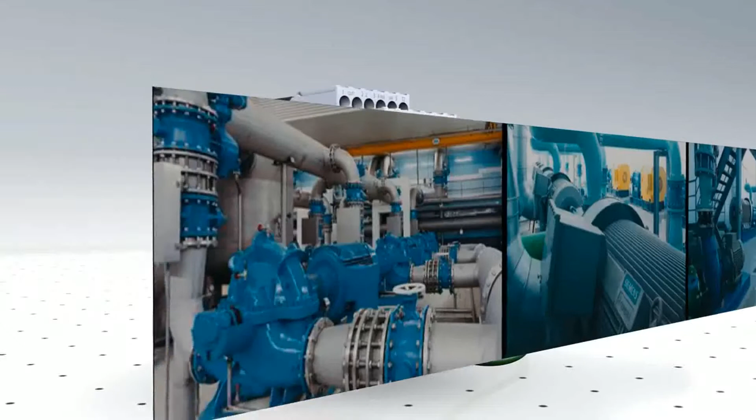As well as security and reliability, energy saving is a core issue for you as a plant operator. To support you here, Simocode Pro for Profinet provides the standardized Profi Energy transmission profile. You can use this option for your energy management without additional devices, thus saving power and so reducing your costs thanks to efficient motor control.

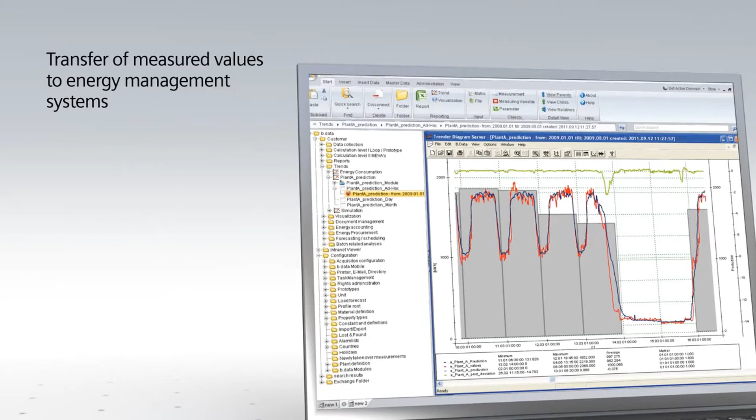An important standard function here is the pause circuit. If a motor is not required, it is switched off for a specific time. A further benefit of Simocode Pro and Profi Energy: the protocol provides measured values such as current, voltage, or power and transfers them to energy management systems. There, they can be analyzed to detect potential savings.

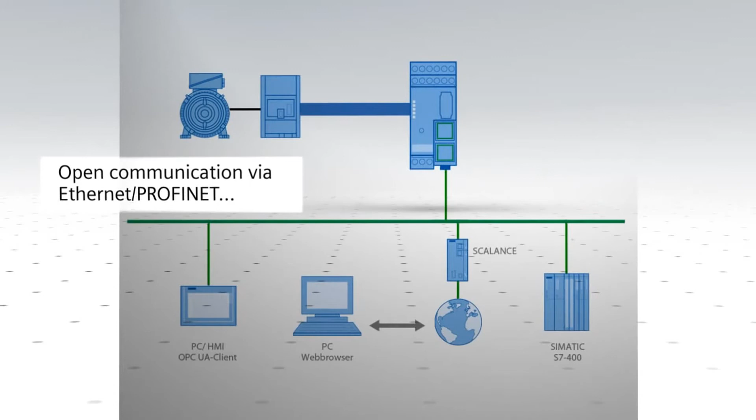Simocode Pro does everything on a single communication link. Communication with the controller runs over Profinet, web-based access runs over Profinet, and the device also transfers data to HMI systems over the Profinet cable on the basis of OPC unified architecture. This means you need only one network for everything, and you save on hardware and cabling overhead.

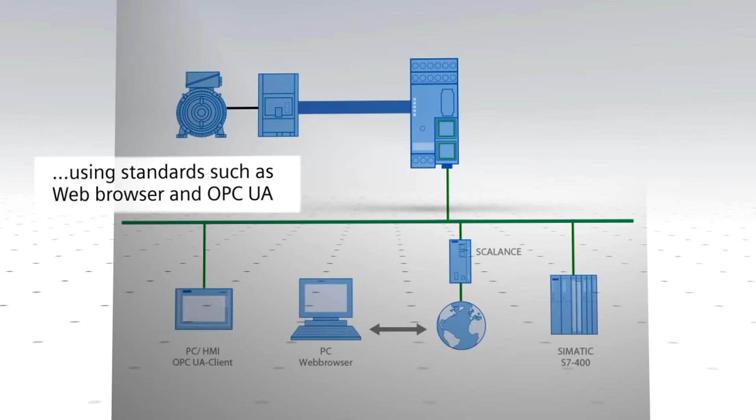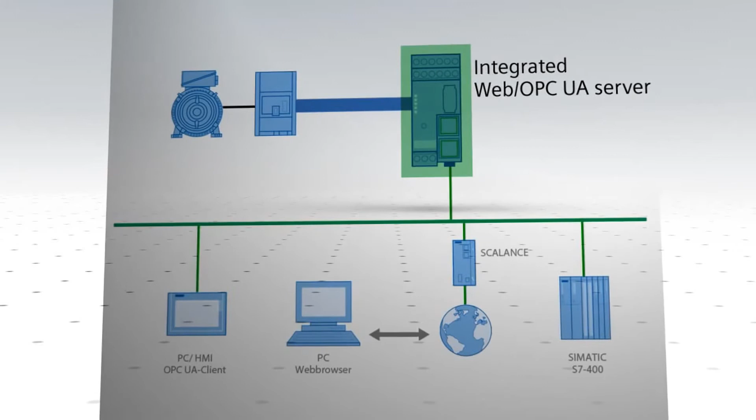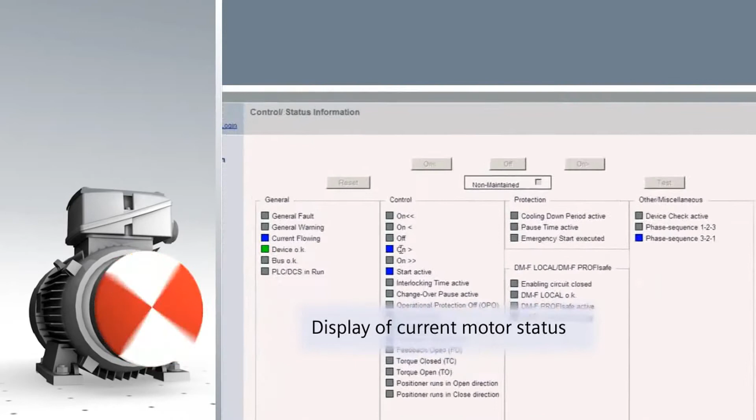Simocode Pro provides all the motor management data online via the integral web server. You can therefore access the diagnostics data simply and securely from any location using a web browser. The current motor statuses are displayed at all times on clearly structured web pages. If a fault occurs, the relevant messages are just a click away. For example, you may see at first glance that the thermistor indicates motor overheating.

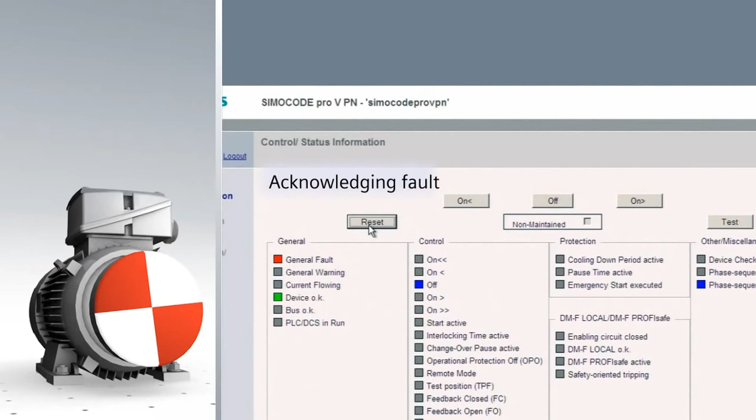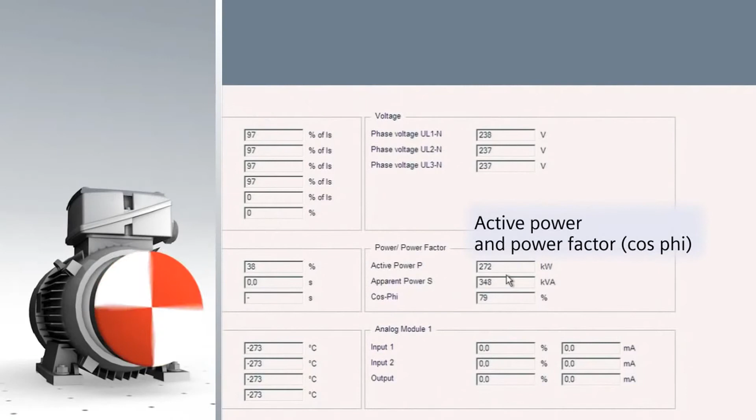To remove the cause of the fault, log into the Simocode Pro as an authorized user. Now you can acknowledge the fault and switch the motor on again remotely. In the browser view, you also have access to current measured values. Whether current, voltage, active power, or apparent power, all the important data of the motor feeder are clearly listed.

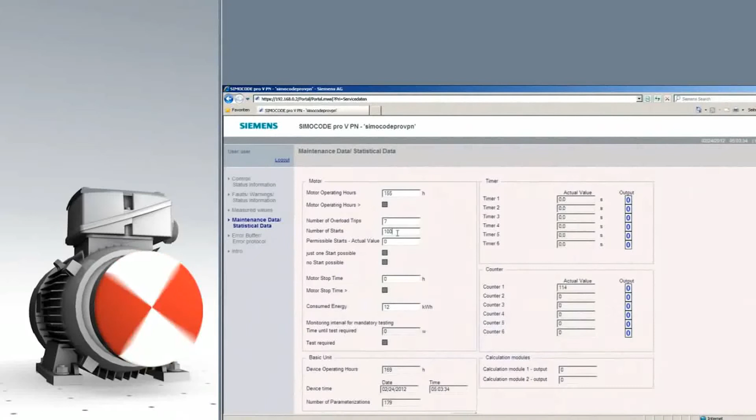In another field, you can also find service and statistics data. The number of motor starts, for example, is particularly relevant for service and maintenance purposes, as is the fault history. In the protocol, you can see all the faults that have resulted in a shutdown, and you can then remove possible causes. You therefore have all the monitoring and operator functions at your fingertips via the web browser, without the need for any additional software.

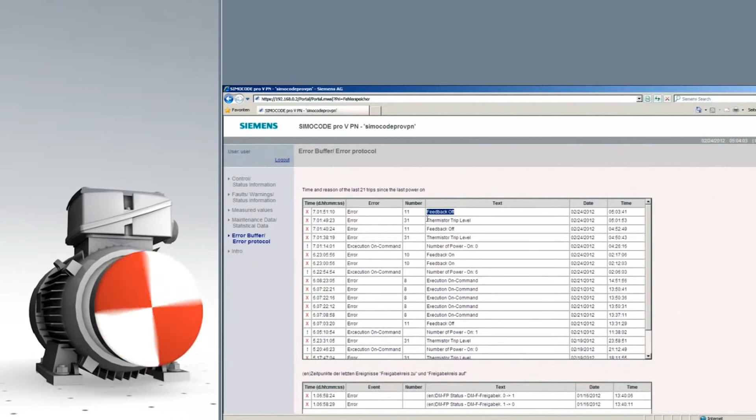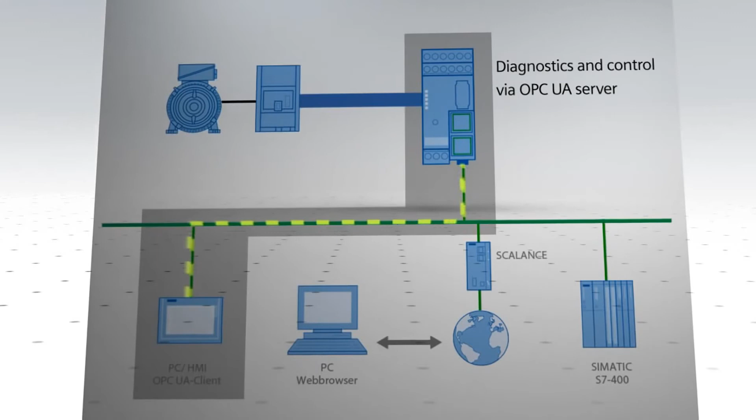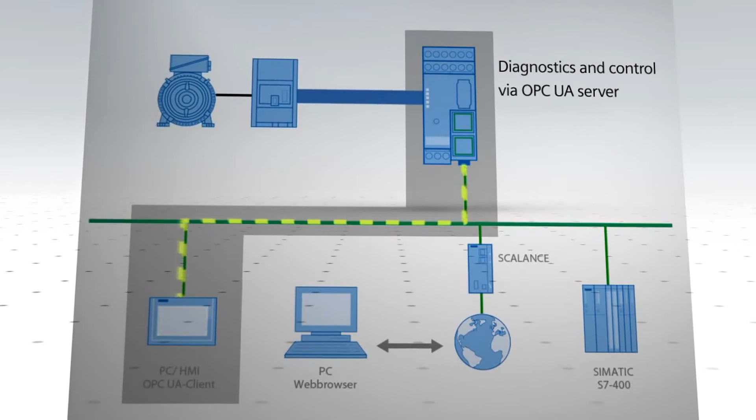Another method for transferring diagnostics and control data is the integral OPC UA server. With Simocode Pro, it is the first time a vendor-independent communication protocol has been integrated into a field device. It supplies data for higher-level visualization and control systems. These data can also be called up individually via local HMI systems where they are used. For example, for human-machine interfacing close to the switchgear, completely independently of the controller.

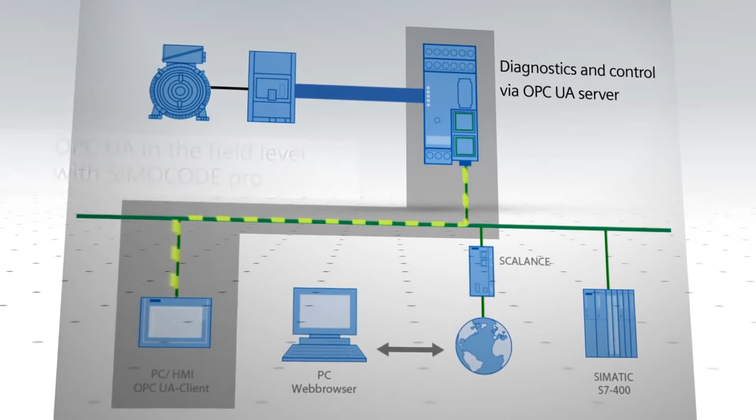Whatever motor data you require here, OPC UA gives you a free choice. Measured values, diagnostics data, current status information, and much more are made available via a secure connection and fully in accordance with your requirements. Using these data, you can set up the image objects of your operator interface dynamically.

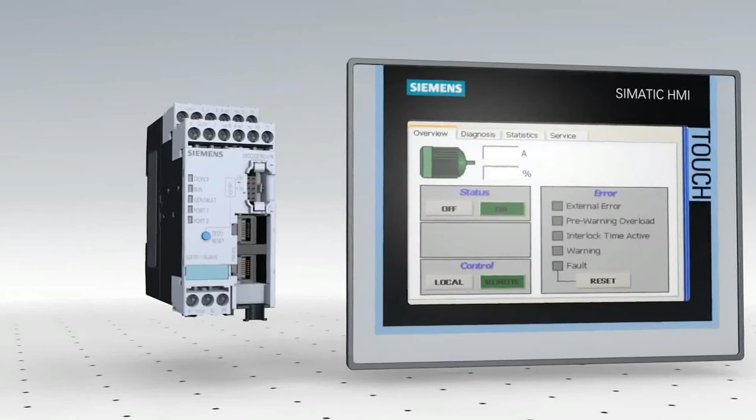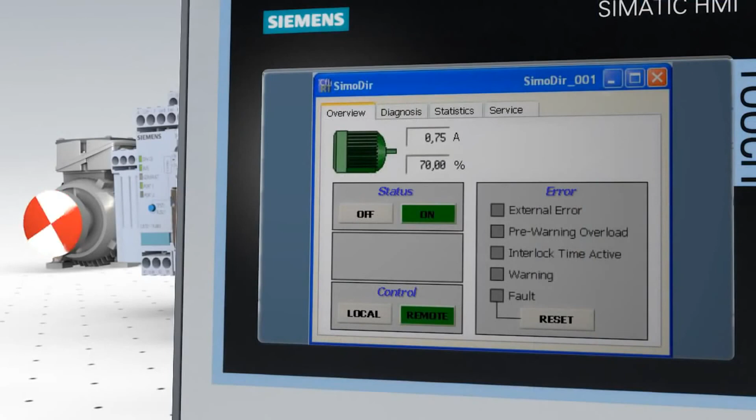Do you work with Totally Integrated Automation from Siemens? Then OPC UA is the right solution for your plant. Because the OPC UA client that enables optimal use of the Simocode Pro server data is integrated into Simatic HMI panels right from the start. With Simocode Pro for Profinet, you profit from all the potential of industrial Ethernet for your motor management.